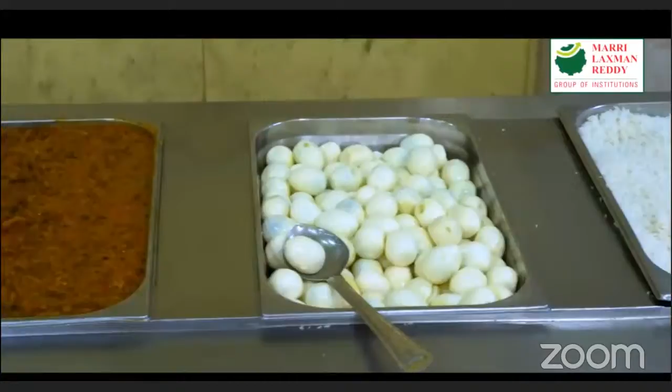Students here tend to learn, experimenting with their life projects through centers of excellence tied up with various industries. Spacious and comfortable classrooms, covered corridors, and advanced laboratories equipped with ultra-modern audio-visual technology, an auditorium accommodating 1,000 plus audience, separate hostels for boys and girls, with each student especially taken care of through facilities and hygienic food in a spacious and eco-friendly canteen are among our salient features.

AICTE recognized MLR Group of Institutions is accredited by NAAC with A grade and has NBA accreditation for all programs. The MLR Sports Complex was inaugurated with the most advanced sports facilities like cricket stadium, badminton court, table tennis, billiards, and basketball.

MLR Sports Complex organizes many national and international university-level sports fests, grooming every aspirant to compete in national and international sports forums, and has successfully achieved 50 gold medals, 13 silver medals, and 16 bronze medals at various national and international sports events. MLR Group provides free admissions every year supporting aspirants under sports quota with scholarships for meritorious sportspersons to pursue their career in sports and opportunities in the government sector.

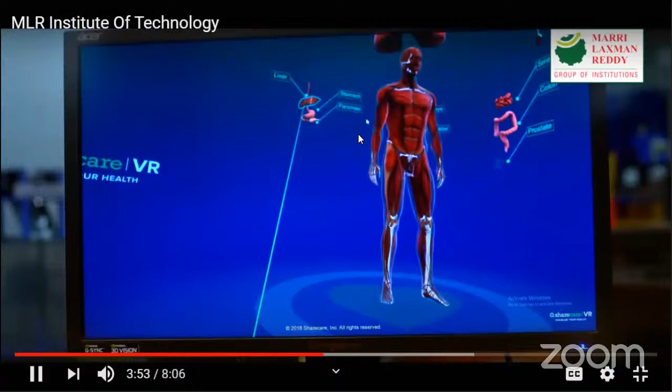To sharpen and educate students' creativity and entrepreneurial skills, MLR Group has established the Center for Innovation and Entrepreneurship, with facilities like Social Square, Innovation Hub, and Makerspace. The Makerspace is a technical prototyping platform for student innovation and invention, loaded with ultra-modern equipment such as multimedia workspaces, 3D printers, CNC machines, and laser cutters.

This provides a stimulus for student entrepreneurs. The center has collaboration with various government and non-government ministries for raising seed funds to incubate student projects and startups, and has developed 8 plus market-ready products and supported 11 plus student startups.

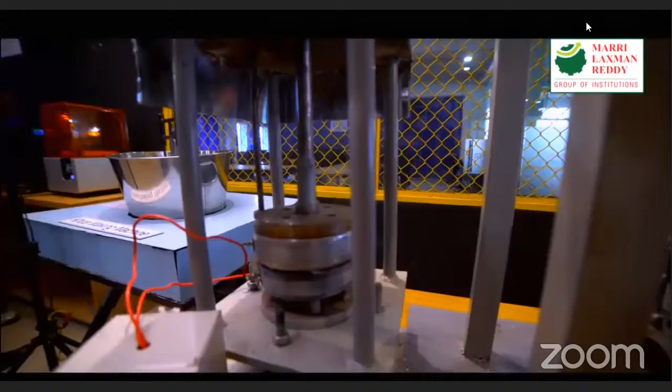MLR Group has set up a livelihood business incubation center in association with the Ministry of Micro, Small and Medium Enterprises (MSME) to promote new technology for livelihood-based enterprises. The Research and Development Cell has 12 centers of excellence in association with various industries, supporting faculty and student research, with a track record of 25 plus funded projects, 700 plus SCI or Scopus journal articles, and 35 plus intellectual property rights, with progress continuing.

In preparing aspirants for real-world competitiveness, MLR Group of Institutions has introduced the Indo-Universal Collaboration for Engineering Education (IUCEE), to introduce outcome-based student-centric education and Bloom's taxonomy-based teaching, learning and evaluation processes, along with projects in community services, EPICS, in association with Purdue University, USA.

SCOPE, the School of Programming Practices, hones coding and programming skills. STEPED, the Students Platform for Engineering Education Development, empowers students to become a factor of change in engineering education and its effect on society and environment.

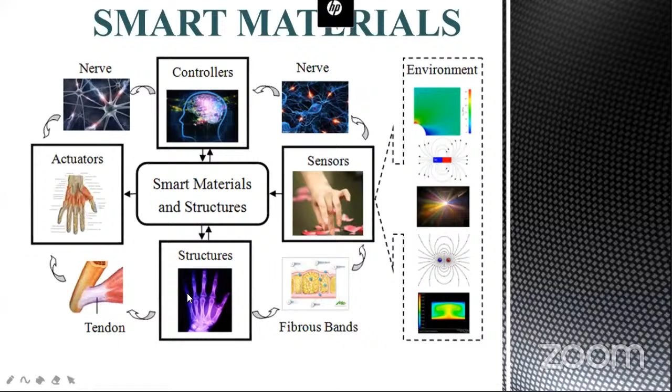Smart materials basically involve sensors, actuators, controllers, and structures. As shown in this diagram, actuators give the required force to the material, the controller controls how much force has to be given, sensors sense how much force is being given, and a feedback mechanism exists so that the structure responds depending on the requirement.

Smart materials are new generation materials surpassing conventional structural and functional materials. These materials possess adaptive capabilities to external stimuli such as loads or environment, with inherent intelligence and mutation of different characteristics. Smart materials have sensing capability and actuation capability. In real-time scenarios, they sense how much force is required and give the required force to the structure in order to protect it from the environment or external forces.

Smart materials are basically classified into two categories: active and passive. Active smart materials possess the capacity to modify their geometric or material properties under the application of electrical, thermal, or magnetic fields, thereby acquiring an inherent capacity to transduce energy. Examples of active smart materials include piezoelectric materials, used in various structures to handle different loads, and shape memory alloys, which give different shapes depending on the environment - if heated, they regain their original shape, and if cooled, they again give some actuation force.

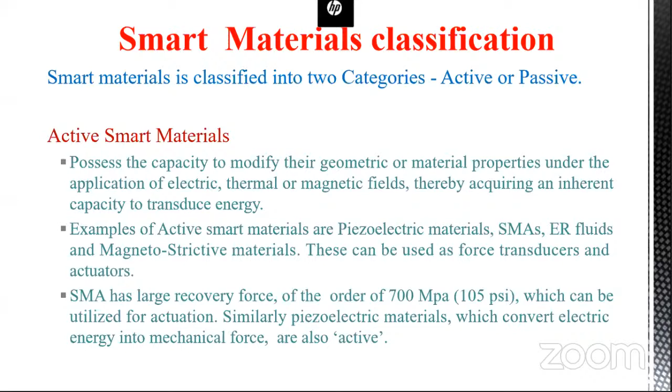Passive smart materials, although smart, lack inherent capability to transduce energy. For example, fiber optic materials are a good example of passive smart materials. Such materials act only as sensors, but not as actuators or transducers.

Different types of smart materials include piezoelectric materials, very common examples where they produce voltage when stress is applied. Since this effect also applies in reverse, voltage across the sample will produce stress within it. Suitably designed structures made from these materials can bend, expand, or contract when voltage is applied. Piezoelectric materials are commonly experienced in various structures and environments in our day-to-day life.

Thermoresponsive materials, either shape memory alloys or shape memory polymers, are materials that can hold different shapes at different temperatures. Shape memory alloys will vary their shape depending upon temperature, and if you change the temperature, they go back to original shape, or if heated, take a new shape as desired. With this, we can alter shapes and experience the forces or stresses required for day-to-day monitoring.

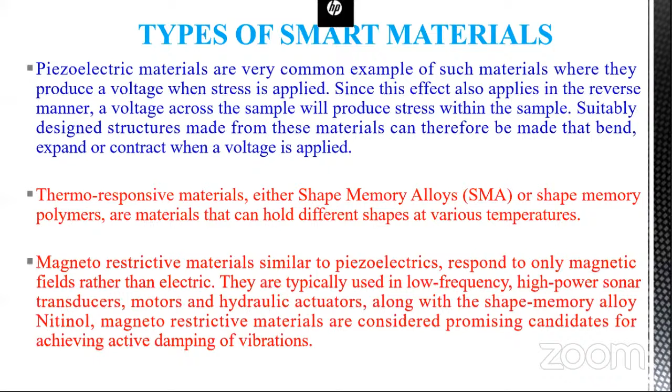Magnetostrictive materials, similar to piezoelectrics, respond only to magnetic fields rather than electric fields. They are typically used in low frequency, high power sonar transducers, motors, and hydraulic actuators. Along with the shape memory alloy nitinol, magnetostrictive materials are considered promising candidates for achieving active damping of vibrations.

pH sensitive materials change their color as a result of changing acidity. This can be applicable for paints that change color to indicate corrosion in the metal underneath. Chromogenic systems change color in response to electrical, optical, or thermal changes. Electrochromic materials change their color or opacity upon application of voltage. A very common example of such types is liquid crystal display materials.

Polymer gels such as hydrogels have a cross-linked polymer structure inflated with a solvent such as water. The gel has the ability to swell or shrink up to 1,000 times, given changes in example of temperature or pH of the material.

What are the various types of applications of smart materials? It can be used for self-repair, like embedding thin tubes containing uncured resin into the materials. When damage occurs, these tubes break, exposing the resin which fills the damage and sets. Self-repair could be important in inaccessible environments such as underwater pipes or in space.

Suppose in space, if any satellite structure gets damaged because of the environment, we cannot go and repair it; it would be very costly. So if you embed smart materials, when the structure breaks, the embedded tube will break and fill the gap with the resin placed there, and the structure will become functional again. This type of smart self-repair kit is available, and is also in practice in various aircraft.

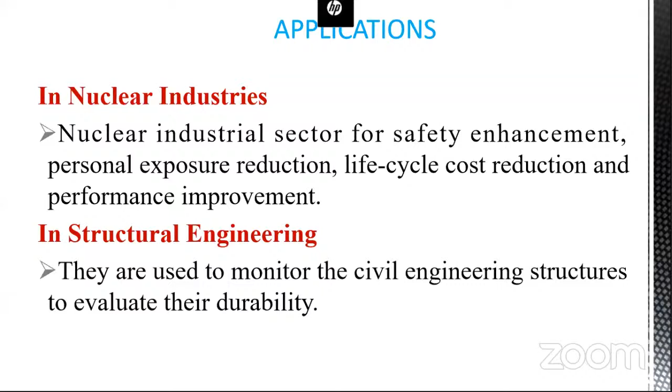In nuclear industries, for enhancement of safety, personal exposure reduction, life cycle cost reduction, and performance improvement, smart materials are extensively used. In structural engineering, they are used to monitor civil engineering structures to evaluate their durability.

What is meant by smart structure? A smart structure will have four components: actuators, sensors, electronics, and control systems. Actuators give adaptive response using shape memory alloys, piezoelectric devices, MR fluids to respond to the environment. Sensors gather information using optical fibers and piezoelectric materials, and pass it to the controller and electronics for transfer of information, signal detection, and control. So the smart system consists of a smart structure with sensors, actuators, and control system.

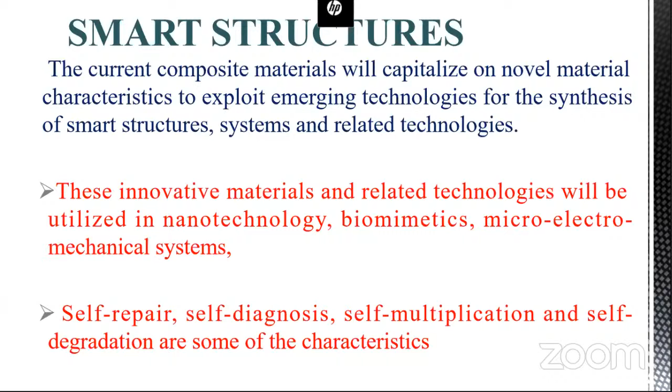What are smart structures? Current composite materials will capitalize on novel material characteristics to exploit emerging technologies for the synthesis of smart structures, systems, and related technologies. These innovative materials and related technologies will be utilized in nanotechnology, biomimetics, and microelectromechanical systems (MEMS). Self-repair, self-diagnosis, self-multiplication, and self-degradation are some of the characteristics of these smart structures.

Multifunctional materials and adaptive structures have intrinsic or extrinsic capabilities to respond to an external stimulus in a useful manner. The external stimulus being sensed could involve a change in the material's environmental conditions, such as light, temperature, pressure, humidity, electric field, and magnetic field, etc.

The response to an environmental change would involve a change in one or more of the material's physical properties, such as size, shape, color, structure, conductivity, magnetization, or polarization.

So, enabling technologies for adaptive structures. An adaptive structure has three basic components: sensors, actuators, and control systems. The performance of these components dictates the overall performance of the adaptive structure. Considerable research and development activities have been directed towards realization of appropriate sensors, actuators, and control systems for customized adaptive structural applications. The technologies related to sensors and actuators are primarily based on physical phenomena, device concepts, designs, material properties, and material processing technologies.

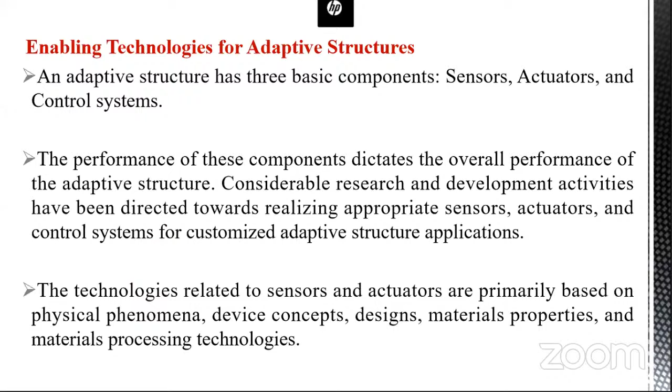Sensors: the application of energy field on a material generates a change in its characteristics. In sensor materials, a slight change in energy field can produce a significant change in one or more characteristics, and this change can be detected. So in order to get the sensor feedback, feedback is a must in a sensor. Sensors and feedback are in a closed loop. The response of sensor material can be either mechanical, electrical, optical, magnetic, thermal, or chemical.

For adaptive structural applications, the most useful response is electrical, which can be monitored and analyzed by control systems. Now, because of digital systems, wherever we want any feedback to happen, digital signals will be very useful, unlike analog signals. So optical strain sensors have been developed within the past few years for aerospace and space applications.

So the types of smartness in structures, as explained earlier, are closed loop and open loop. Closed loop smart structure senses the changes to diagnose the nature of the problem, takes action to mitigate the problem, and also stores the data of the episode for future reference. Open loop smart design is such that structural integrity is enhanced only when needed, and the structure relapses to its normal state when there is no need for enhancement.

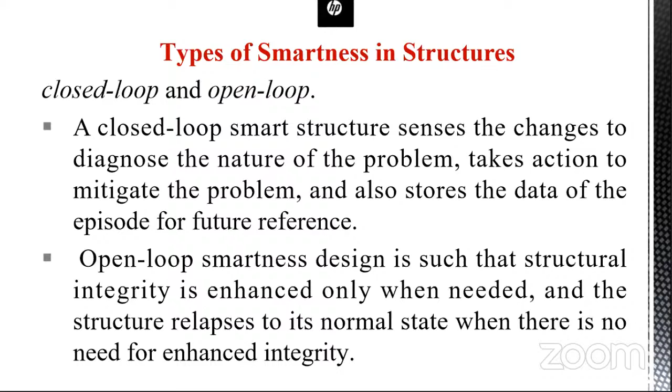So, biomimetics. Biological structures are all smart structures. If you mimic biological structures, the smart structures, we can implement it in mechanical or electrical systems. Biological structures or systems are the smartest, and in terms of energy consumption, the most economical.

So man-made smart structures are on an evolutionary path in the following sequence. You can see the various smart structures as explained here. Actively smart structures will have sensor, feedback, and enhanced actuation system. Very smart structures will have sensors, feedback, enhanced actuator action, plus one or more other biomimetic features.

So, intelligent structures: actively smart structure endowed with a learning feature so that the degree of smartness is increased with experience. So there are wise structures. They are called wise structures because moral and ethical decisions also they can take.

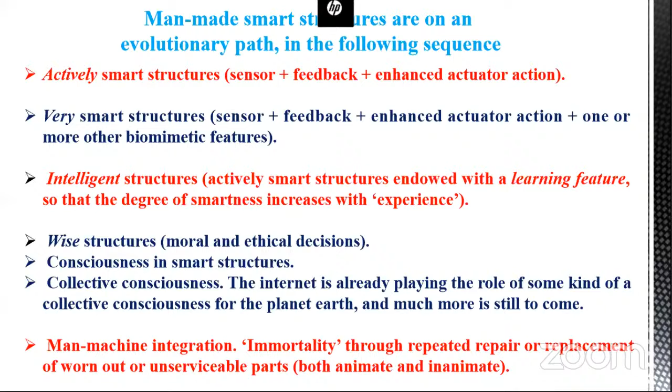Consciousness in smart structures, collective consciousness. The internet is already playing a role in some kind of collective consciousness for the planet Earth, and much more is still yet to come. So the man-machine integration with intelligent structures is the order of the day. So both wiseness and intelligence are built into these features.

Shape memory alloys have the ability to return to their predetermined shape when heated. Shape memory alloys are basically used wherever a force is required. If you change the temperature, the force can be obtained by change in the shape of the materials. So we are using a lot of shape memory alloys in our aircraft and missile applications.

So when this alloy is below its transformation temperature, it undergoes low yield strength and will deform easily into any new shape, which will be retained. If this alloy is heated above its transformation temperature, it changes its crystal lattice structure, which returns to its original shape.

Shape memory alloys are remarkably different from other materials, primarily due to shape memory effect and pseudo-elasticity, which are related with the specific way the phase transformation occurs, biocompatibility, high specific strength, high corrosion resistance, high wear resistance, and high anti-fatigue property. Shape memory alloys are taking active shape in all the new generation aircrafts and missile systems, which is extensively used for complete remote applications.

Shape memory alloys are used in many applications such as aerospace, medical, automobile, tubes, controllers for hot water valves.

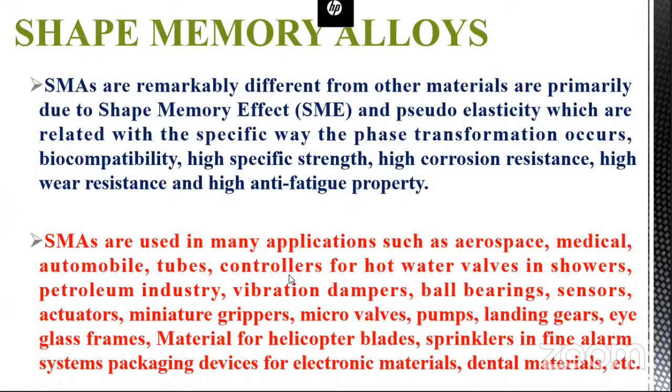Phase transformation process for shape memory alloys. This is basically a metallurgical marvel. If it is cooled, the austenitic behavior will change into martensite behavior. Again, when it's heated, it comes back to austenite. So for this property, we are using it for different applications.

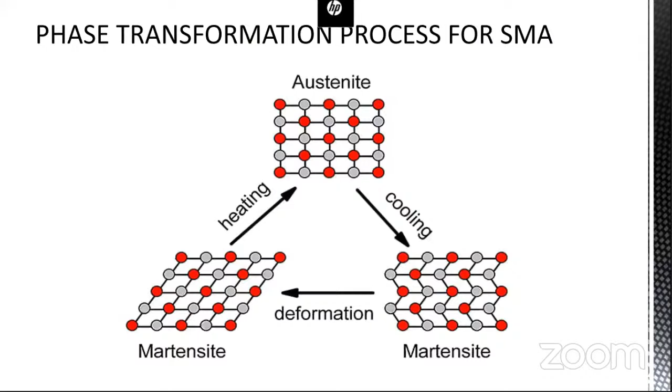So the change in material shape, which is acting as a force, is converted into actuation force. So smart actuators give force whenever required as per the structural applications.

So what are the smart actuators? Recent developments of microelectronics and communications have widely contributed to the evolution of sensors and actuators and have given rise to an increasing interest in distributed intelligent systems. The local data processing capabilities associated with the sensors and actuators give them new functionalities, promoting them to the status of smart sensors. So we are using a number of smart actuators in our systems to deploy the wings, deploy the landing gear applications.

Many such applications are there in the aircraft and missile fields. The distribution of intelligence among all the components of the automation system transforms the centralized supervision systems into distributed intelligent systems. The interconnection of a number of intelligent objects which produce or consume information via communication systems associated with global management rules. Local computing power generates locally available information for the overall supervision system or for the smart instruments.

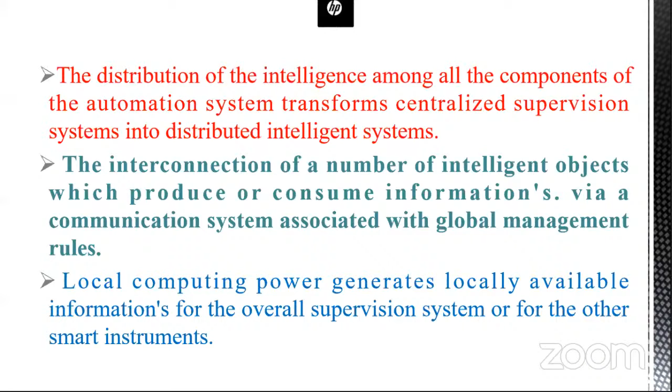So for an actuator to be smart, its efficient collaboration with a sensor is of utmost importance. The sensor senses the stimulus from the environment under investigation. The actuator then acts as a muscle and gives the required force for the actuator movement.

So you can see there are various composites used in different aircraft and missile applications. This is one diagram which is showing self-healing composites. So composite is a layered material.

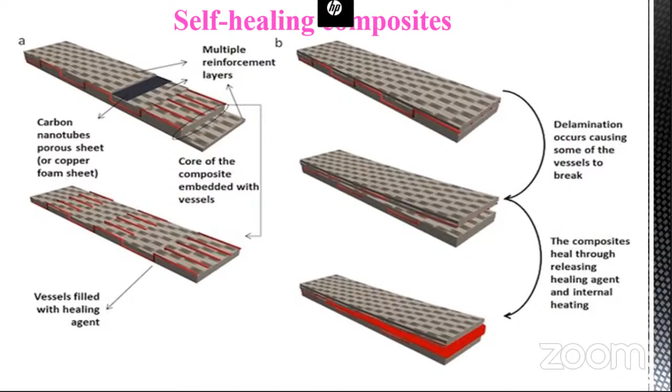We can embed some of the resins in the form of a liquid in the smart composites. Whenever the composite gets delaminated because of the hostile environment, the resin, whichever is kept inside the composite, will get broken, and the resin will flow into the delamination area, and again it gets bonded. So that is the way we can repair the composites remotely. This is called the self-healing of the composites.

So we can see achieving materials that are able to repair themselves after damage, the same as what biological samples do, was an important issue. Using such smart materials would decrease the need for continuous and expensive supervising, repairing, and difficult reinforcing.

This matter is more important for cases such as space stations, underground submarines, and sensitive nuclear foundation constructions for their limited access of supervising technicians. Suppose in space, if some structure gets damaged, it is very difficult to go and repair there. Suppose if you embed such self-healing composites in the structure, so whenever the structure gives way, the self-healing capability will make the structure all right.

However, in the best conditions where supervision or diagnostics are performed accurately, it wouldn't certainly lead to a practical repairing. So engineers try to model self-healing materials inspired by biological systems. By taking advantage of nanotechnology, engineers imitate healing mechanisms of living organs to accomplish the strategies of self-healing materials.

Inspiring function of blood cells in blood clotting motivates researchers to make microcapsules filled with healing agents. This self-healing practice came by observing normal human beings, how when something happens to the skin, the stoppage of the blood happens automatically. So in the same manner, we want to mimic the structures in engineering also with the self-healing capability.

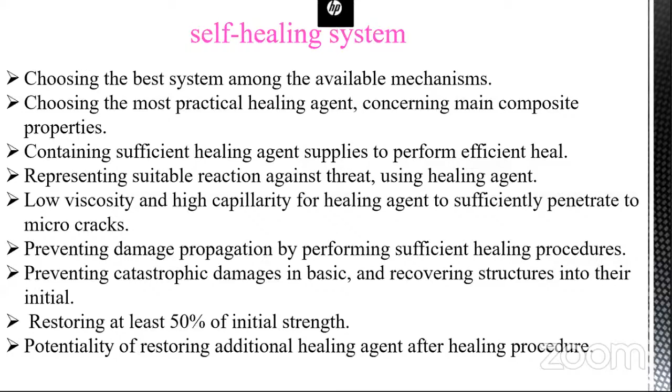So in this method, tiny spherical microcapsules filled with the healing agent are embedded in the main composite, accompanying catalyst in the main composite. Usually the healing agent is made of dicyclopentadiene, which easily polymerizes in the presence of a catalyst and transforms into a hard substance, making the structure operational again.

I will briefly explain about composites in my next session. Just wait, I will share the screen.

Are you able to see my screen, madam?

Advanced composites for aerospace applications. Till now I have talked about smart materials, which is an emerging field, and we have also adopted using smart materials in a small way. Now I will explain advanced composites, which we are already using extensively, with some case studies. I will be just briefly telling about composites.

What is a composite? Composite materials can be defined as a combination of two or more materials differing in form or composition on a macro scale, but acting in concert in combined form, retaining their identities across the interface between one another. So fibers plus resin equals composite. One constituent is called reinforcement, and the other, which is embedded, is called the matrix or resin.

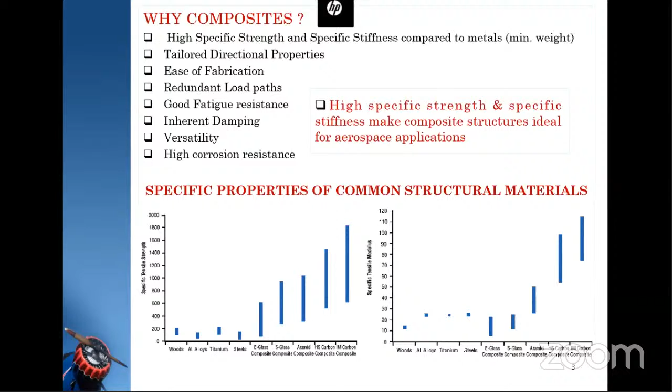So why are composites gaining so much importance? The main reasons are high specific strength and high specific stiffness compared to metals, tailored directional properties, ease of fabrication, redundant load paths we can create, good fatigue resistance, inherent damping capabilities, versatility, and high corrosion resistance. Compared to metal with respect to weight, composites give more strength relative to their strength to weight ratio. So high specific strength and high specific stiffness make composite structures ideal for aerospace applications. Composite materials basically consist of two main materials: one is called fiber and another is called resin.

What does the fiber do? Fibers carry the principal load carrying members and provide necessary strength and stiffness. Fibers are drawn into small wire kind of material, so these have very low internal defects compared to bulk materials like metals. Fibers will have very high L by D ratio.

What is the resin? Resin supports the fibers and protects them, gives shape to the structure, and acts as a media for load transfer between the fibers. A resin has a lower density, strength, and modulus than fibers. Fibers are useful only after they are bonded together to take the form of a structural element that can carry loads. Combination of fibers and matrix results in lower density.

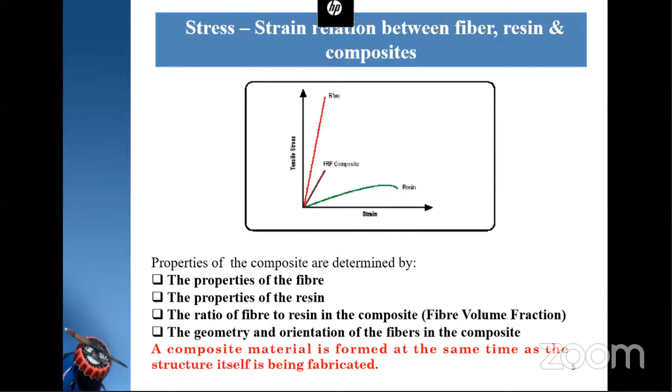There are various types of composites, classified depending upon the matrix and depending upon the reinforcement. There are basically metal matrix composites, which include mixtures of ceramics and metals such as cemented carbides and other cermets, as well as aluminum or magnesium reinforced by strong and high stiffness fibers.

There are other composites called ceramic matrix composites. A less common composite matrix, aluminum oxide or silicon carbide are the materials that can be embedded with fibers for improved properties, especially in high temperature applications.

Polymer matrix composites, which we are widely using in our missile applications, are thermosetting resins, mostly epoxies or phenolics, which are commonly used with various types of fibers like e-glass, carbon, boron, and silica.

There is another variety of composites called carbon-carbon composites. Here, the high temperature capability is achieved by converting the resin into carbon. The reinforcement is already carbon, and the resin used as a binder can also be converted into carbon through various cycles.

Carbon-carbon composites are very useful in high temperature applications, which we have developed for nose cones of re-entry vehicle systems and carbon-carbon brake discs.

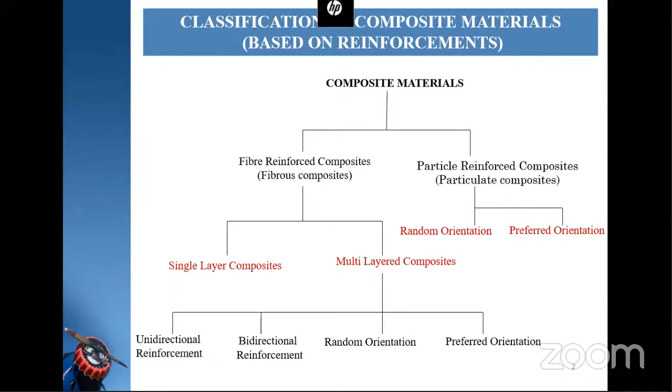Classification of fibers: fibers are the primarily load carrying members. Classification of fibers is based on materials, composition, and precursors. We can see varieties of fiber in the market.

Glass fibers are widely used for all commercial applications: E-glass, S-glass, D-glass, R-glass, high silica, and C-glass. Carbon fibers are extensively used in aerospace applications; these fibers are costly and available in limited quantities.

Carbon fiber is also based on the precursors available, like rayon-based carbon fiber, pitch-based carbon fiber, and high-strength or high-modulus fibers. Depending upon the application, we choose the fiber suitable for that application, and based on that we use the reinforcement.

Aramid fibers are basically used for impact applications, like bulletproof jackets and bulletproof materials for automobiles. Boron fibers are used in limited different applications.

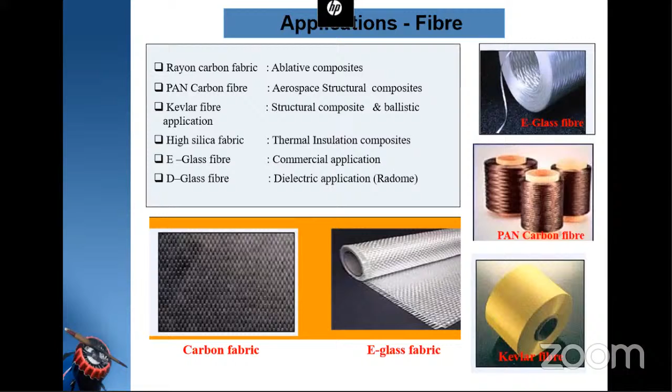E-glass fiber is meant for commercial applications, basically wherever low strength is required. We are using E-glass fiber extensively for jet deflectors and different ground-based applications. D-glass fiber is used for dielectric applications, basically radomes.

Carbon fiber takes most of the properties better in terms of performance, that's why it is used extensively in aerospace applications. Compared cost-wise, carbon fibers are costlier than glass fibers, but the other properties are very useful, so you get a better component with less weight. That's why composite carbon fiber is gaining a lot of importance.

For ballistic applications, aramid fiber is used where we get impact resistance, like bulletproof jackets and bulletproof vehicles made using aramid fiber.

There are basically two types of resins. The primary function of the resin in composite materials is to transfer stress between the reinforcing fibers and to protect the fibers from mechanical and environmental damage.

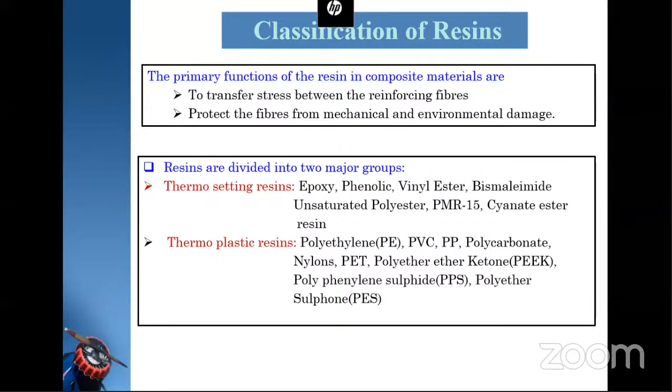So thermosetting resin systems - epoxy resin system and phenolic resin systems - are basically the two materials widely used in our aerospace industry. Epoxy resin systems are a two component resin system, resin and hardener, and it has adhesive in nature. Resin has adhesive in nature, no byproducts released during curing, and it gives high mechanical properties.

Used for structural applications. If you see phenolic resins, which we are using widely for our missile applications to make the structures in nozzles, which has to withstand very high temperature, and the re-entry vehicle structures, we are using phenolic resin.

There are two types of phenolic resins. Resole type, it is a self-cross-linking phenolic resin. Then Novolac requires a hardener. So this phenolic resin will be a high char yield material and ablative material. Volatiles are released during the polymerization process as a byproduct.

This has to be taken out by using a vacuum application. The equipment which we use for polymerization is called autoclave, which has simultaneous heating and pressurization application, and simultaneously we can vent out the byproducts by using a vacuum. Voids form during curing in phenolic resin, and that we have to avoid by using the vacuum bagging technique.

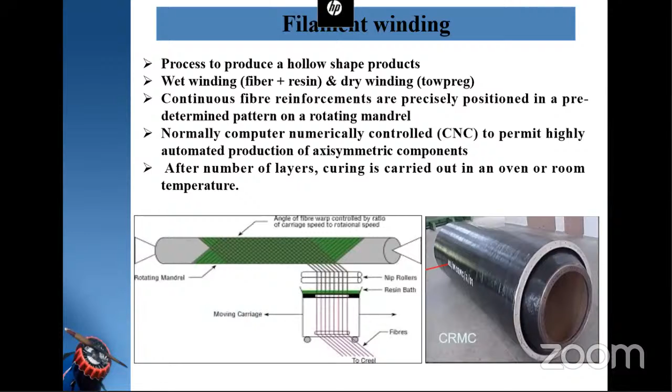So there is another technique called tape winding technique. It is similar to the filament winding machine, but in filament winding, filaments will be wound on a mandrel. Here, the tape is a part of the fabric which is already weaved into a different shape. The tape can be put onto the mandrel with the help of a preheating arrangement, and also the tape which is wound on the mandrel, we can apply some force and make nice components.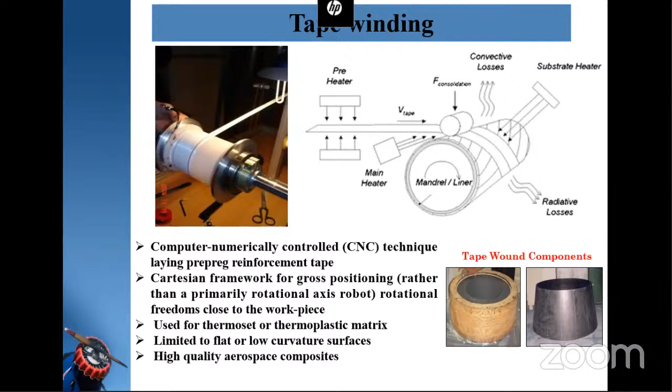Very thick components can be realized in this tape winding process, which is used for nozzle applications. As you see in the diagram, divergent cone shaped articles and cylindrical shaped throat backups are manufactured by this method. This method is extensively used in our aerospace applications like nozzle applications and some other components, used for different nozzle materials. There is another important technique called compression molding.

Compression molding is a process where we use a hydraulic press to make components using a punch and die. The charge is placed between the punch and die, and simultaneously the mold is heated and pressure is applied to consolidate the polymer matrix composites.

Materials like fiber fabric impregnated with resin are charged to a specific size mold, closed and heated under pressure. We have realized nice components using this technique, around 1 meter diameter and around 400 mm thick. This is like a forging kind of material we can make, and then we can machine it to the required shapes for the nozzle components.

The charge is placed in the cavity of a matched die mold in an open position. The mold is closed by bringing two halves together using a hydraulic arrangement. Pressure is exerted to squeeze the resin so that it fills the mold cavity. While under pressure, the mold is heated and the polymer is polymerized to get nice composite components suitable for highly thick components. Here you can see this is one of the products we have made.

Here the mold is filled with carbon phenolic prepreg flakes and it is put into the cavity of the mold. The punch comes from the top and closes. Once it is heated and pressure is simultaneously applied, we make the convergent of a flex nozzle system. Here we can get high density composites, but with variation in strength and thermal conductivity because of the flakes configuration, high volatile content, giving rise to more erosion.

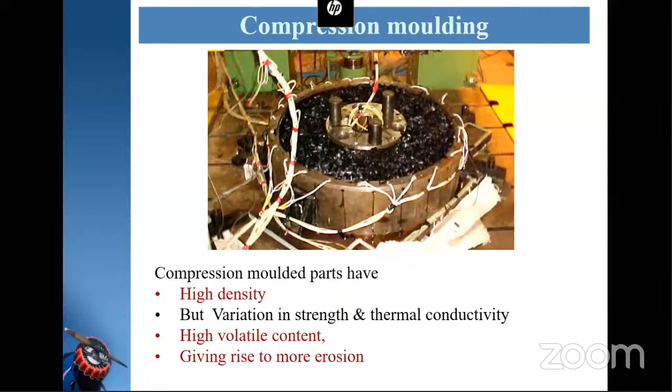There is another important process called vacuum bagging method, autoclave bagging, and pressure bagging. These are all called match die molding methods. Here one side we use the mold, and on the other side a flexible bag kind of material that is called a vacuum bag, where we make the components, and it will be cured in an autoclave. So here we can apply simultaneously the pressure and heat also, so that we will get nice polymerized composites.

In some applications, we can apply the pressure through a bag using thermofluids, so we can apply the heat. That is also called the pressure bag technique. The composite material is pressed between heated matched dies. Pressure required depends on the flow characteristics of the feed materials. The feed material flows into the contours of the mold and cures at high temperature.

In this process, near net shaped components can be obtained. Here we can see the conical part, which is made at one go. Suppose in metal, if you want to make this type of cone, you have to make the sheet, cut it into shape, roll bend, and then weld. But unlike in metals, with composites, if we have the mold, we can place the fibers, put both the male and female molds together, heat it, and the final component is obtained.

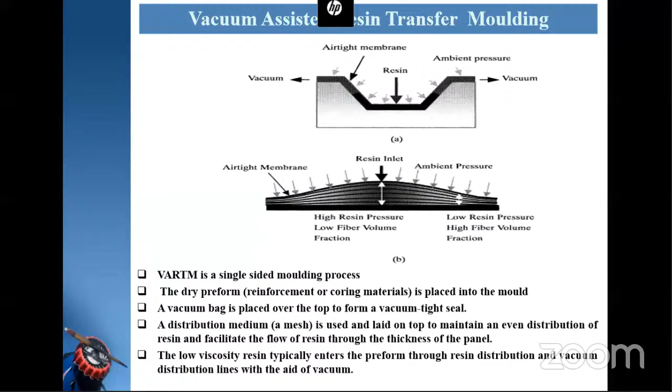So this method is widely used for commercial applications. This is a normal method, wet layup or hand layup process. Here one side mold is used, then the fiber is placed, and the resin is taken and spread across the reinforcement by using a hand or spray layup process. This is basically used for commercial applications.

The most important process in terms of current aerospace production is the hand layup of prepregs. In spite of steady progress to replace the hand layup process with automated process, it still persists as the method by which at least half of all advanced aerospace composite structures are made. It is extremely flexible and capable of making a wide variety of shapes. The process involves preparation of the mold, application of release agent, application of gel coat, hand layup, curing, trimming, and finishing. So hand layup process is widely used in aerospace applications also.

We can make varieties of components by using prepregs, a wide variety of components. We can put the fibers wherever extra thickness is required. Variable thickness components also we can realize by this process.

Just like the hand layup process, there is another technique called spray layup process, which is used for commercial applications and mass production. Here the fiber and resin are both cut and sprayed by using a gun. This layup process also uses a one side mold. So it's a variation of the hand layup technique.

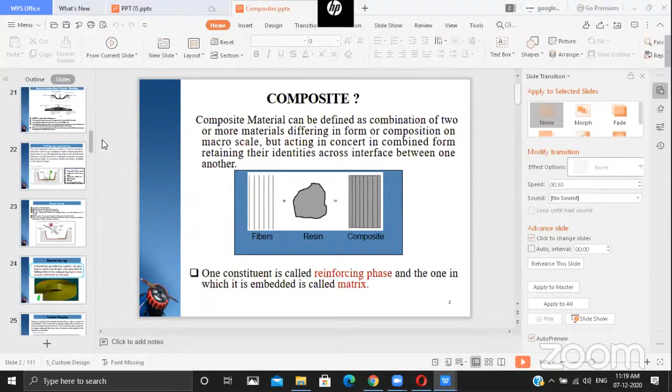Hello, are you able to hear me? Yes sir, we are able to hear you. This is another important technique, layup technique called rosette layup technique. Yes sir, we are able to see that.

This is another important technique called vacuum bagging technique, which I already explained, where we can apply pressure of about 1 bar, 1 atmospheric pressure, through a vacuum bagging technique, where there is no autoclave. Such components we can realize by using the vacuum bagging technique.

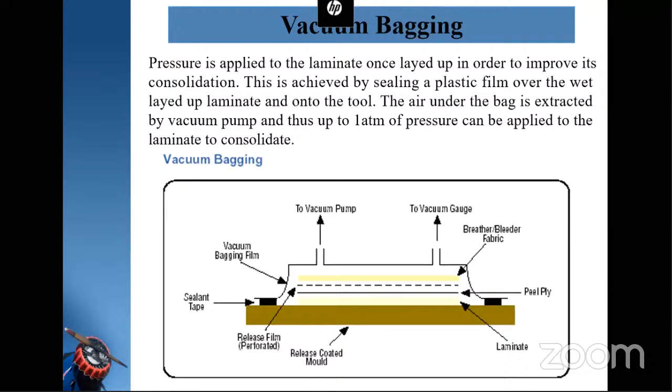This is an equipment called autoclave curing. Autoclave is a pressure vessel where we can apply simultaneously pressure, temperature and vacuum to polymerize the composites. This method is widely used in aerospace industry to cure the components. We get good consolidation of the parts through this method. Here you can see this is a pressure vessel where we can keep the component inside and simultaneously apply heat and pressure through air and vacuum also in order to extract the volatiles from the component. This is an important equipment in the aerospace industry.

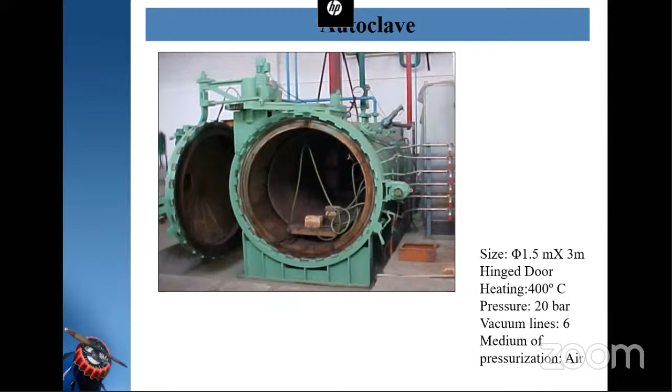So here you can see the actual equipment which is installed in our laboratory. It is around 1.5 dia and 3 meters long, with a door mechanism like a pressure cooker concept. The door is designed so we can heat the component up to 400 degrees centigrade and apply pressure around 20 bar, with vacuum lines given for extracting volatiles from the component during pressurization. 6 vacuum lines are available, and we can apply a maximum of 1 bar negative pressure in the component.

So this is another important technique called impregnation of the fiber with the resin system, called an impregnation plant or prepreg plant. Here you can see the schematic diagram.

The fiber comes from the unwinder and gets heated into a preheating chamber where volatiles are evaporated. You can heat up to 80 or 100 degrees centigrade, and then it gets into a squeezing station where the resin is available, and it gets mixed with the resin.

The excess resin is squeezed out between two rollers called the squeezing station, and then it gets heated onto heating zones 1, 2, 3, 4, where each zone is maintained at different temperatures so that all the volatiles are evaporated, and it gets cooled in a cooling roller chamber, and then unwinded onto a roller.

So here you can see this actual prepreg plant which is available in our advanced systems laboratory, where we regularly impregnate the fabric with the resin system using phenolic resin. This is a vertical impregnation plant, we call it.

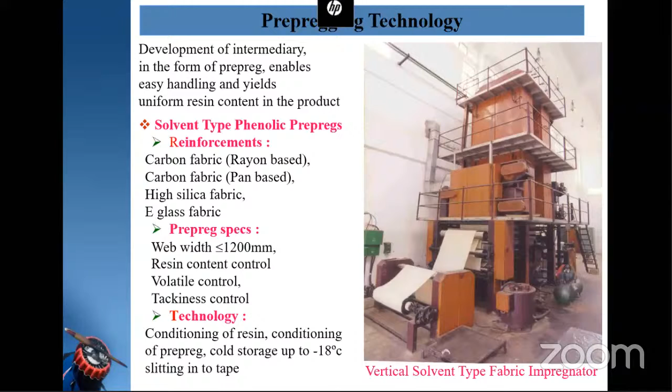In this impregnation process, we have to control the resin content, volatile content, and tackiness content. For this, we have different parameters like squeezing, heating, and cooling. All these parameters we have to control while doing the impregnation process.

We can use very high temperature resistive applications like re-entry vehicle structures, which can withstand up to 3000 degrees centigrade. Then ultra high temperature composites, carbon-carbon nose tips, and control surfaces we can get using these composite materials.

Then structural applications, we are using radomes where the front part of the aircraft nose cone is made of radome, which is made in polymer to enhance electromagnetic radiation capabilities. The inside antenna will be there, emitting and receiving electromagnetic waves in order to detect the enemy, where enemy aircraft or targets are placed.

Then secondary structures, we have different types like warhead casings, ablative liners for nozzles, and thermal protection system components that can be realized. So there are various types of machineries and materials used in composite technologies.

We have 5-axis filament winding machines, meant for different types of axis symmetric components. Then autoclave, then we have a CNC tape-laying composite machine, and lattice structures. Then all the composites which are made have to undergo ultrasonic testing, called non-destructive examination.

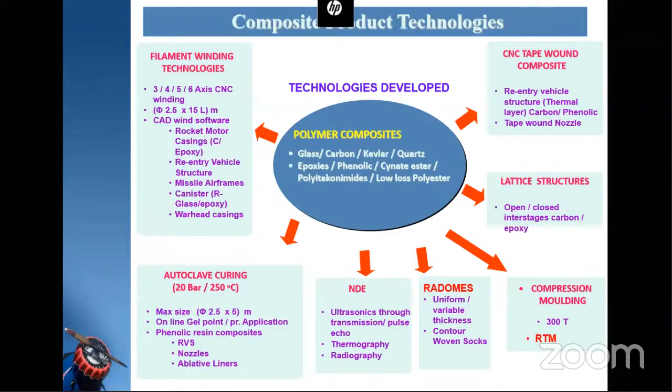And we are also using resin transfer molding techniques. The basic fibers used in our setup are glass fiber, carbon fiber, Kevlar fiber, and quartz fiber. The resin systems we regularly use are epoxies, phenolics, cyanate esters, polyitakonimides, and low-loss polyester materials.

Here I will be explaining some of the case studies which we have developed in our advanced system laboratory for different aircraft and missile applications.

The composite drop tanks are developed for the first time in India with state-of-the-art technologies. It is the lightest in its class, designed for lightning protection, and has the least radar cross-section. Drop tanks are mounted externally either inboard or midboard of the wing stations or under the fuselage, in order to enhance the flight duration.

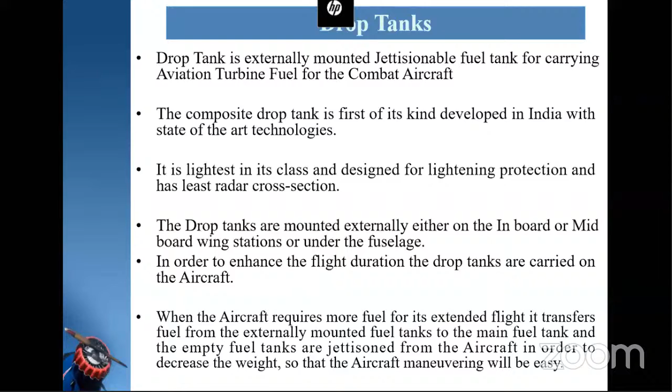When the aircraft requires more fuel for extended flights, it transfers fuel from the externally mounted fuel tanks to the main fuel tank, and the empty tank can be jettisoned to increase maneuverability. Inside, the tank has baffles, bulkheads, structural components, and sensors, along with various cutouts for filling fuel and transferring it between the main craft and the drop tank.

We have developed 3 varieties of tanks. One is the 800 liter tank, with a diameter of 550, length around 4.5 meters, weighing around 78 kgs. Compared with aluminum tanks, these are almost half the weight, which is why they are developed in composites.

Then the 1200 liter inboard tank, with diameter 640, length around 5.04 meters, weighing around 100 kgs. It can carry 1200 liters of fuel.

This aircraft has varieties of cutouts to fill the fuel, and for safety we have relief valves and other features. For the connection between the mother tank and the main tank, we have fuel valve and air valve connections. To carry this tank on the wing, we have an ejector release unit, ERU, embedded in the tank.

These are made by hot melt epoxy prepreg technique, which is the main process used, along with hand layup and autoclave molding with a female mold. The tank consists of varieties of components like sheet metal parts, bulkheads and brackets, metallic parts, piping, electrical and rubber parts, metal fasteners, and line replaceable units.

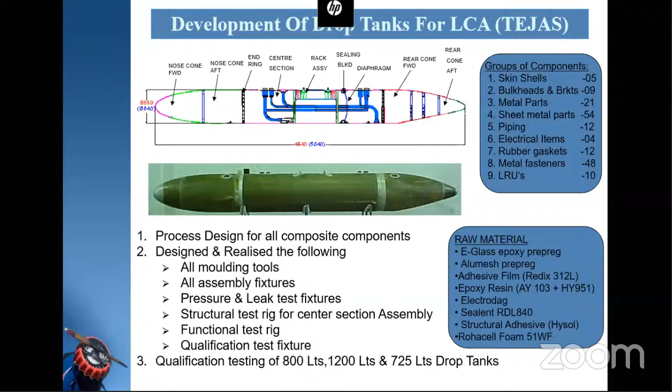We did the process design of all composite components, and designed and realized different types of molding tools, assembly fixtures, pressure and leak test fixtures, structural rig, and for the center section assembly, functional test rig and qualification test rig. These are all developed, which I will explain in subsequent slides.

Co-curing and co-bonding technology was developed for the aluminum cap with E-glass prepreg, nose cone forward and rear cone aft, and the aluminum joint ring with E-glass prepreg for the nose cone aft and rear cone forward.

We designed and realized templates for surface development cuttings, and adopted the transfer foil technique for placing plies at the desired place and orientation. Process and cure cycles were developed for autoclave molding, compression molding, oven curing, and thermoforming of foam.

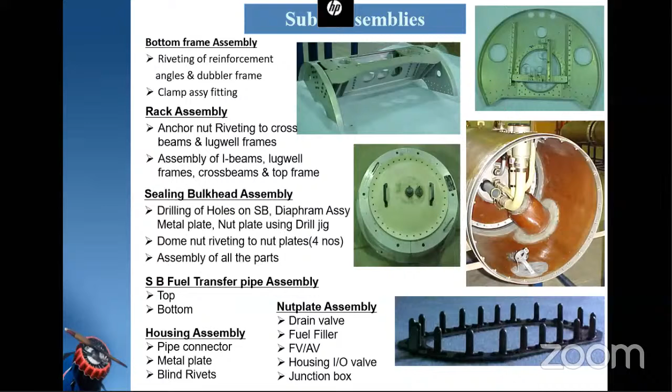These are all the sheet metal parts which go inside the fuel tank: support bracket, air pipe, support bracket, transfer pipe, clamp assembly, bottom frame assembly, various anchor nut riveting assemblies for the fuel tank, cross beam, lug well frame, I beams, and joint end rings. These are all the metal components which go inside the fuel tank.

Composites are basically porous in nature because of the fabric weaving nature and the method of manufacturing. Composites will be slightly porous, but the fuel tank should be non-porous. For that, we do resin coating inside the fuel tank in order to make the tank leak proof. So here we have developed a mechanism for the resin coating.

We heat the composite using externally mounted IR lamps, and resin coating is given inside the tank, which gets rotated so that uniform coating is applied all throughout the surface. For that, we have developed different varieties of fixtures.

Once the tank is coated with resin, we again test for leak proofness, and carry out a lot of assemblies. The cone is made in two parts, and these all get assembled as shown in the diagrams. Finally, the tank is assembled and tested for its leak proofness using different types of fixtures.

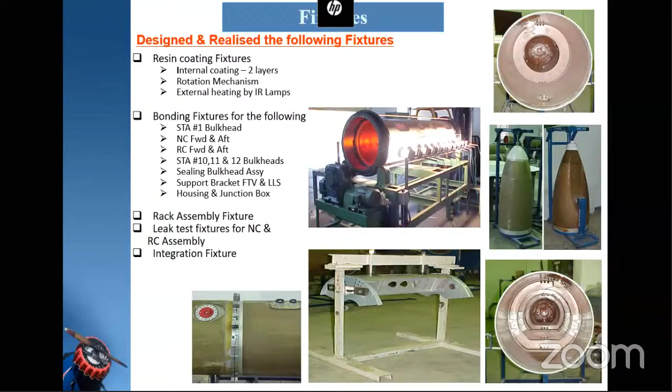So here we have to incorporate a lot of sensors inside the tank, as I explained earlier. There is a high-level sensor, low-level sensor, fuel transfer valve, and junction box assembly in the fuel tank.

So when the fuel tank is assembled to the bottom of the aircraft, the pilot should be able to know how much fuel he has in the tank. All this information is fed to the pilot dashboard using the electrical cable harness and sensors embedded in the fuel tank, so the pilot can know whether the tank is connected to the aircraft, how much fuel is available, and when he can jettison. All this information is available to the pilot on his dashboard.

Once the tank is made, we carry out a lot of tests for acceptance and qualification. Here the tank is tested for structural application using hydraulic actuators and a power pack, where we apply 2 tons load, then 4 tons load onto the lugs for 5 minutes to see if the structure can withstand that load. Similarly, we carry out fuel leak tests and pneumatic tests for qualifying different joints like junction box, housing, and sealing bulkhead.

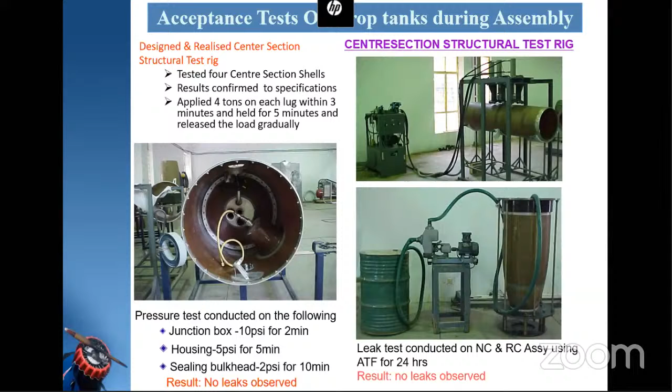So we do a lot of acceptance tests before going to the final assembly. Here we have developed one functional test rig for conducting various tests on the drop tank. This is a completely automated, computer-controlled testing setup where we can perform a lot of operations using this rig.

Simultaneously, in the same rig, we can do functional tests like leak check by air, leak check by fuel, and strength or pressure test with fuel at around 20 psi for 5 minutes. Then we carry out a refueling check at 4.5 psi or more than 150 liters per minute, checking the refueling transfer rate. We also do a transfer check at 100 lpm from the drop tank to the main tank. So we can conduct a lot of tests using this rig.

In a similar way, we have to do the qualification test of the tank. Whatever aerodynamic loads come onto this tank are converted into uniformly distributed loads and then point loads, which we apply using this tree. We applied loads on 3 axes, X, Y, and Z, simultaneously, and measured the reaction loads using different types of load cells. We bonded strain gauges and measured strains at various locations, and measured deflections using linearly variable differential transformers.

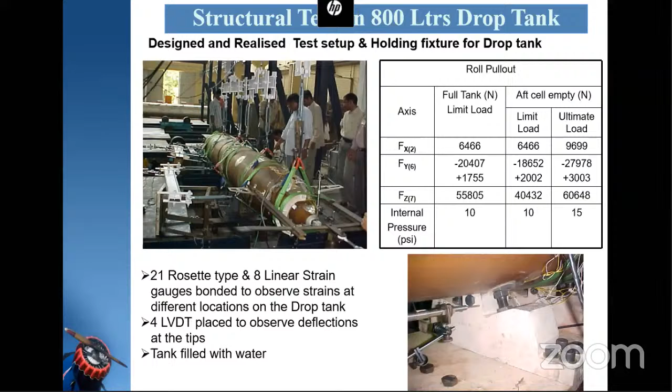Simultaneously, we pressurized the tank by filling it with water up to 15 psi. This is a one-time test which we successfully carried out, and all the measurements are within our predictions. So this is qualified for flight.

Here is another case study, a closure plate, RVS composite closure plate, meant for the re-entry vehicle structure. This is developed by composite press molding, made of carbon fiber and phenolic resin, since the plate has to withstand severe thermal load. That's why we used phenolic resin, and ribs are also incorporated to avoid deflection of the component. This component is made in one go using a two-sided mold in a compression molding technique.

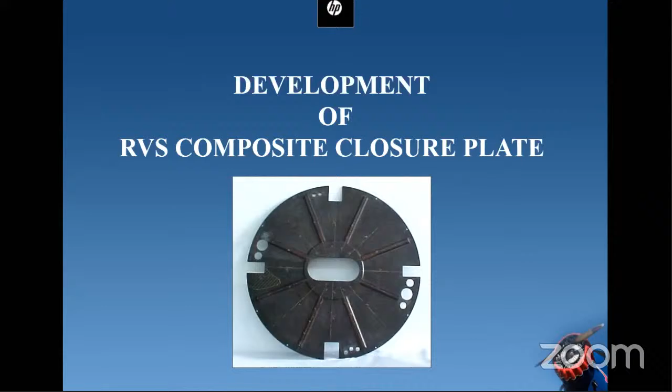For the sake of passing cables and other things to move through, we have made small cutouts. This is a lightweight plate made with ribs on one side and a plain surface on the other. Both sides of the plate should be very smooth, and it has to withstand a severe thermal environment for re-entry conditions.

Provisions are made for passing the cables and other VTP thruster modules. It should be fastened at the aft end of the bulkhead of the re-entry vehicle structure. The inside packages of the RVS system should be protected from the hyperthermal environment. We have selected an easy manufacturing route called the compression molding route.

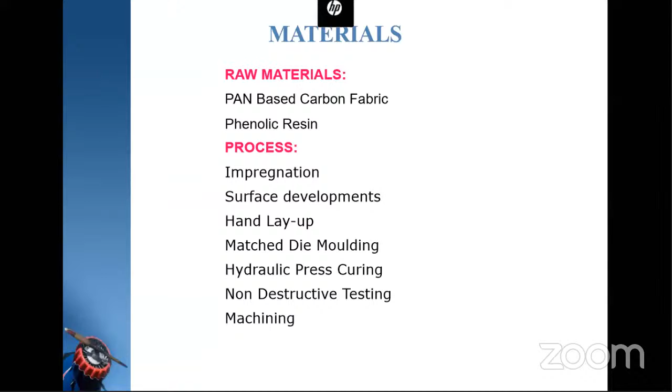Here we can see PAN-based carbon fabric and phenolic resin chosen as the fabric and resin materials. The process involves impregnation, surface development, hand layup, matched die molding, hydraulic press curing, non-destructive testing, and machining. This is the fabric specification which we used, and this is the phenolic resin.

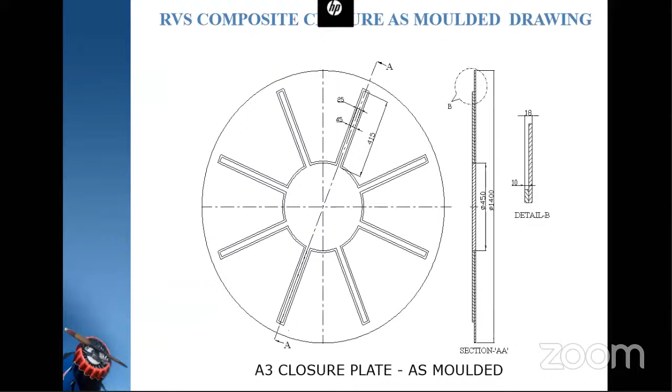This is the drawing of the component, and this is the model. These are the cutouts indicated after making the component. This is the final model with cutouts, and this is one side of the tool.

This is a compression cure cycle where we have applied around 200 tons for realization of this component. Depending upon the surface area, we can calculate the load applied onto the component, and this is the cure cycle, heating up to 180 degrees centigrade for a duration of almost 500 minutes.

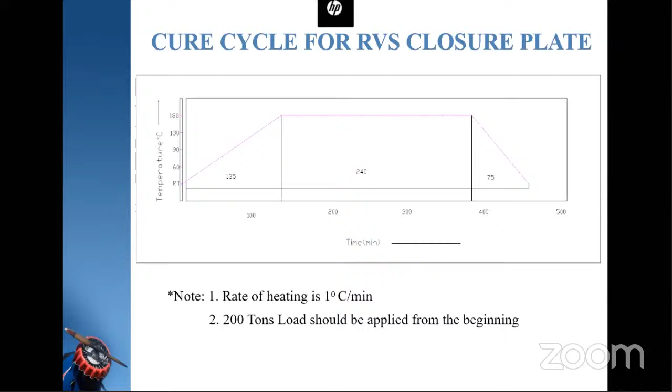This is the final shape of the component which we have used. This type of plate we have made around 40 numbers for various applications.

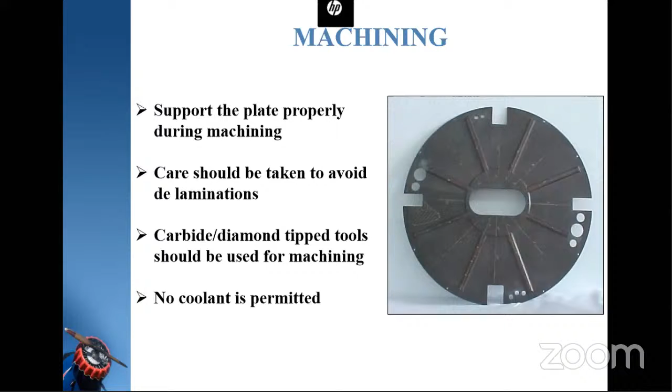These are the tests we have conducted, like ultrasonic test. Then we are doing sample tests also to find out the resin content and density. Then dimensional inspection test. This is the machining we have carried out to give the final shape and meet the requirement of the packages going onto the component.

This is another component made using carbon fabric and epoxy resin system, which has to withstand very high load requirements. This component has ribs on both sides, because to avoid deflections we have designed the plate in such a way that it will have ribs on both sides.

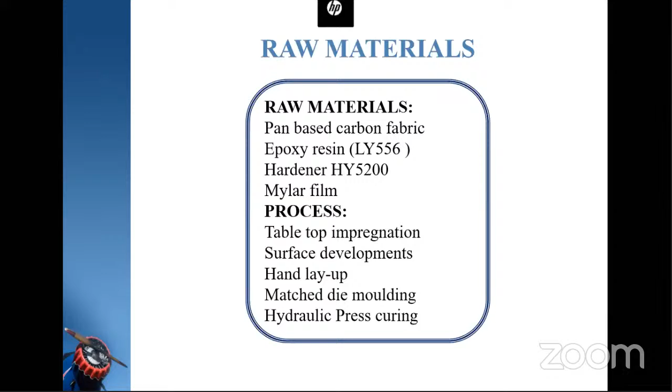It is made in a hydraulic press. The materials used are carbon fabric and epoxy resin. The process is hand layup and match die molding, with hydraulic press curing. This is the properties of the components which we have evaluated by making laminates.

Here you can see longitudinal modulus, transverse modulus almost the same, shear modulus, Poisson's ratio, then longitudinal strength, compressive strength, transverse tensile strength, transverse compressive strength, and in-plane shear strength.

These are the developments which we have used for realization of this component. These are the layer sequence, different layers, and rib thickness also we have shown here.

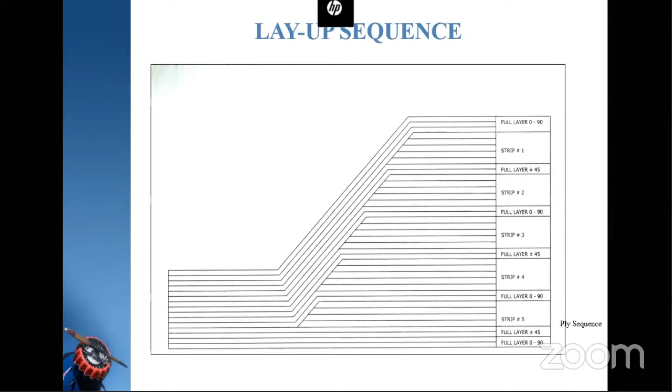This is the plate which we have on both sides, with extra stiffeners on the plate on both sides. This is the cure cycle which we have used.

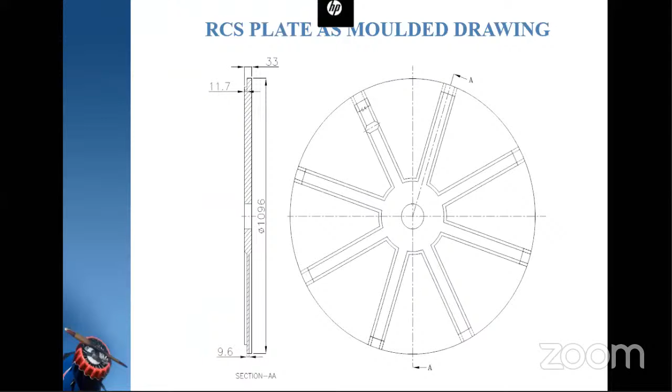This is the plate photograph which we have developed, having 8 ribs on both sides, the same similar shape. Here you can see the thickness cross section of the component. Here you can see the plate is tested ultrasonically and found in good condition.

Then we have developed samples also from the component and conducted density and resin content tests, with dimensional inspection also carried out using CMM. This is the final component which has small cutouts in order to accommodate packages.

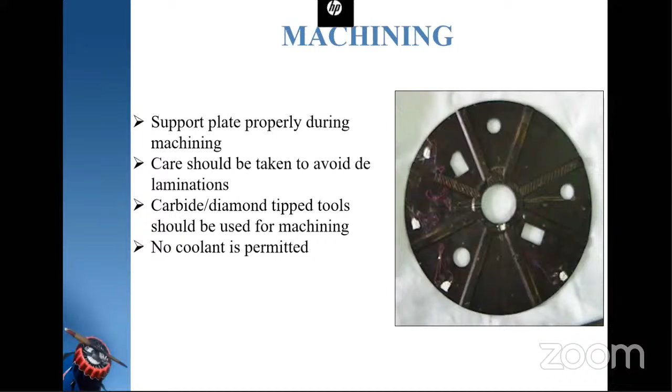This is done in order to give provision for cables and pipes. This is the component drawing. These are the final different cutouts shown in the component.

These are the properties which we have obtained using traveller coupons: ILSS, flexural strength, flexural modulus, tensile strength, tensile modulus. These are the maximum number of specimens we have tested. Minimum value observed, maximum value observed, and the average value is given here.

Then this is the load test which we have conducted in order to qualify this plate. We have applied different package loads, like air bottle and propellant tanks, which are situated on this component.

The load experienced during re-entry conditions is simulated using actuators, like a 5-ton actuator at 2 locations and a 10-ton actuator at 1 location. This is the schematic diagram.

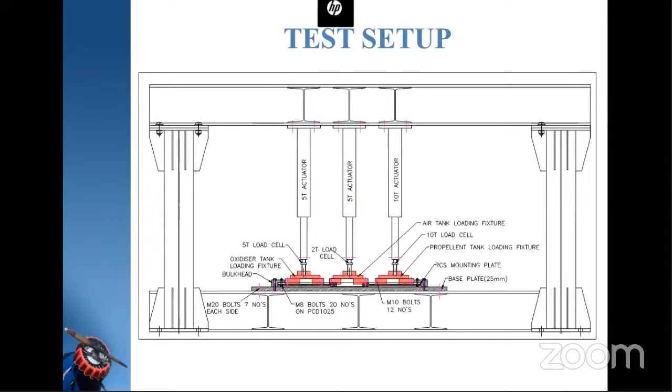This is the actual test done at our structural material test facility by simulating the loading conditions. Load is applied and we have measured strains and deflections at different locations in order to qualify this plate.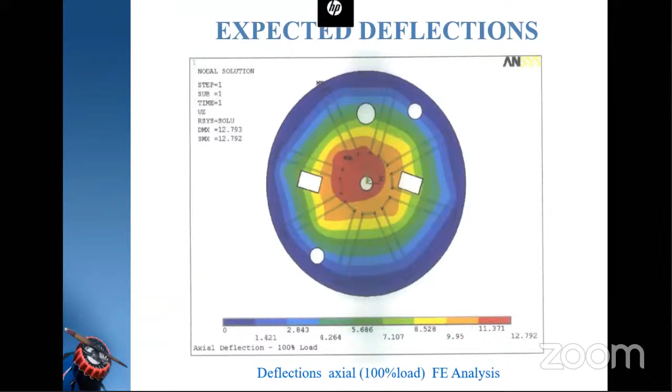This is another important component made in composite, the jet deflector, which is used under the missile. When the missile takes off, the plume hits this deflector.

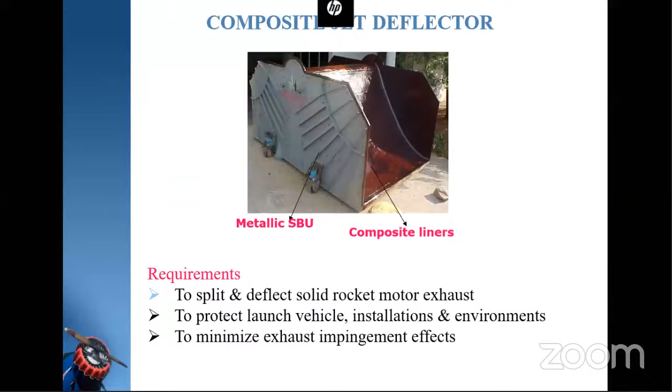The plume has very high velocity and high temperature, and it has to be dissipated in 2 directions without damaging the launch complex and the launcher related instrumentation. So the main function of the jet deflector is to split and deflect solid rocket motor exhaust gases to protect the launch vehicle from the environment and minimize the exhaust impingement effects.

So here you can see this configuration, the entire surface area is divided into different shapes of the liners, like sidewall liners, profile liners, and top of the component called ridge component.

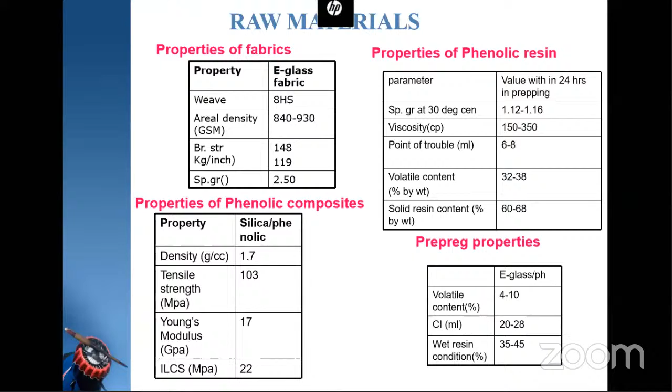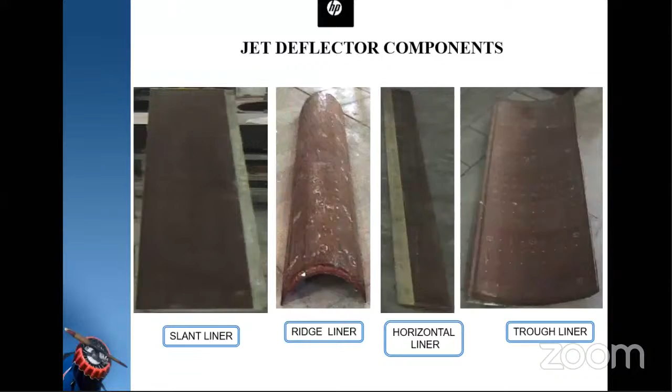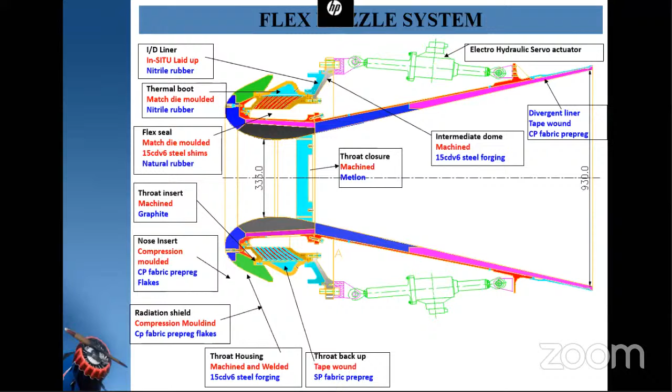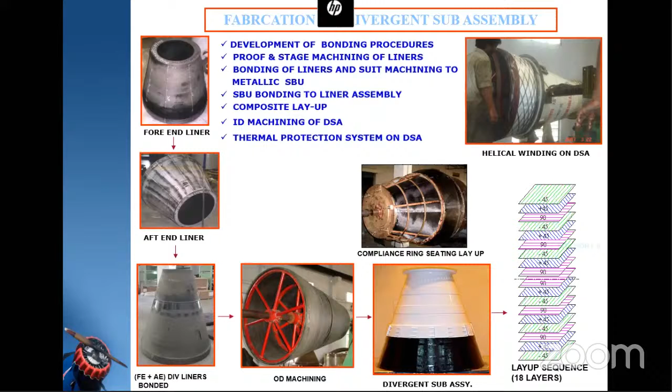So this is a divergent flow chart. We can see forend liner, aftend liner, then both bonded together, externally machined, internally machined, then it gets bonded to the structural backup. We are making composite structural backup using different layers. Here it is shown 18 layers, how we are using different types of concepts. So this is another important element.

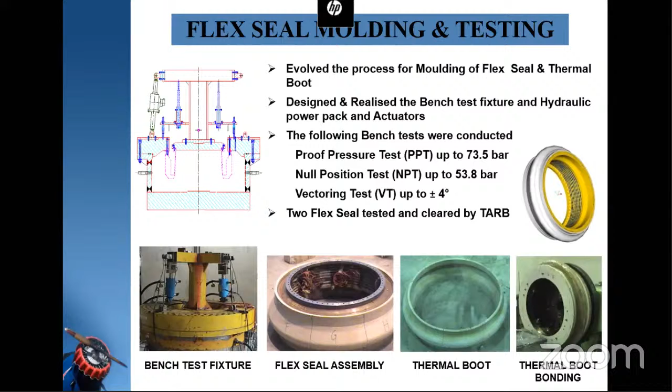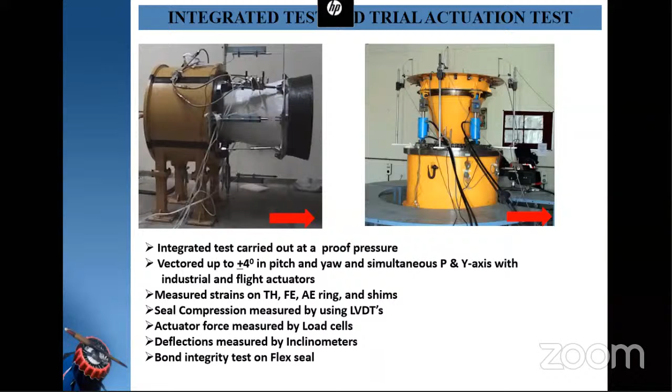During this test, we are measuring a lot of strains on different members called throat housing, forend and aftend ring. Then seal compression also we are measuring by using LVDTs. The actuator force is measured by using load cells. The deflections are measured by using inclinometers. Then bond integrity test also carried out after the integrated test.

So there is another important element in the missile system called composite rocket motor casing, which is done by filament winding technique as explained in the previous slides. Here we can see this is the composite rocket motor casing, which houses around 10 tons of propellant, having a 2 meter diameter and around 3 meter in length.

One such similar case, having 4 meter length and 1 meter diameter, is done for structural test applications. We have developed this technology for different missile applications. So different types of composite rocket motor casings are made, from 500 mm diameter, 3 meter length to around 2.4 meter diameter, 10 meter length casings, which can carry around 50 ton propellants, are also realized with this same technology.

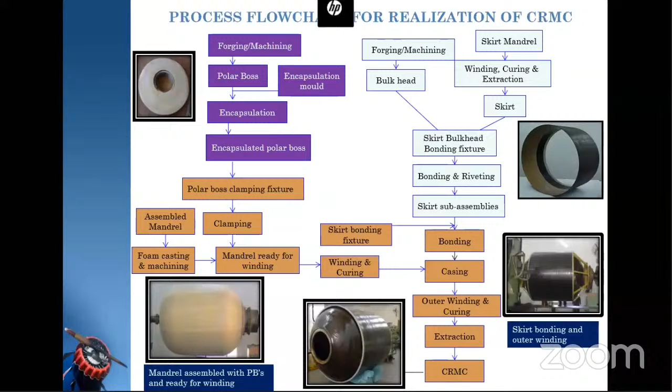So here is the flow chart which is meant for realization of the composite rocket motor casings. Here we can see the mandrel is made by using foam and central shaft. Then using the filament winding technique, the composite casing is made, and subsequently the skirts are bonded in order to make the complete casing.

So these are the complete rocket motor stage we call it. This has a propellant inside and igniter at the one side and the nozzle at the other end. So here, composite is used extensively in order to gain the weight advantage and to get more thrust for the given propellant.

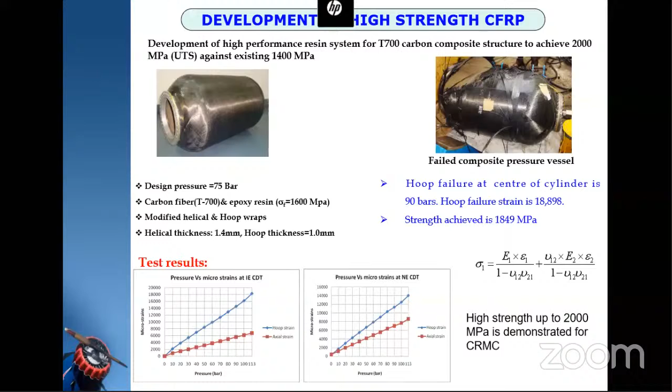So this is the pressure vessel made for realization of CRMC. Before realization of CRMC, we completely characterize the materials which we are using by doing a subscale motor. We have done all the characterization.

Then these composite rocket motor casings will withstand very high temperature environments because of its velocity and accelerations. So this outer surface has to be protected with external thermal protection system, which is made by silicone resin, in order to protect the surface of the composite from the hyperthermal environments.

So this is another variety of composite canister technology we have made. You can see the length of the composite is around 8 meter length, single shell wound in a single setup. These are meant for storing the missile system and launching the missile system. This technology is also established on our side.

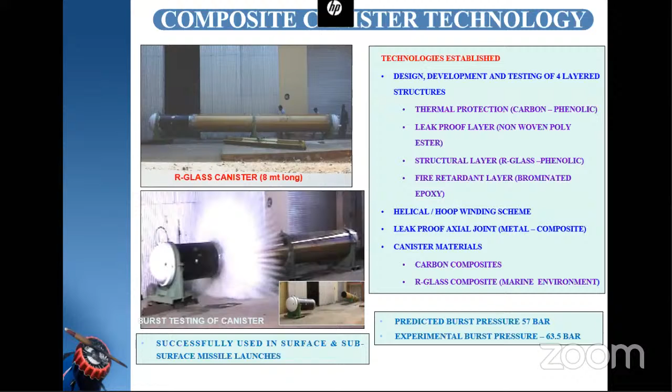This is one of the tests where we have done the burst test in order to find out the design capabilities of the canister. So these are the other important components called radomes, which are meant for giving electromagnetic transparency.

There is an antenna inside this radome, which allows electromagnetic waves to pass through this material and absorb in order to find out the enemy location. These techniques are used. These are the inevitable materials for aircrafts for getting the desired functionality of electromagnetic transparency.

So we have developed varieties of radomes with varieties of materials like Kevlar, low-loss polyester, glass, polyetherimide, D-glass, cyanate ester, E-glass phenolic, like different composites are made. So this is, as I already explained, the stiffened shell which is made of different hoop and longitudinal layers.

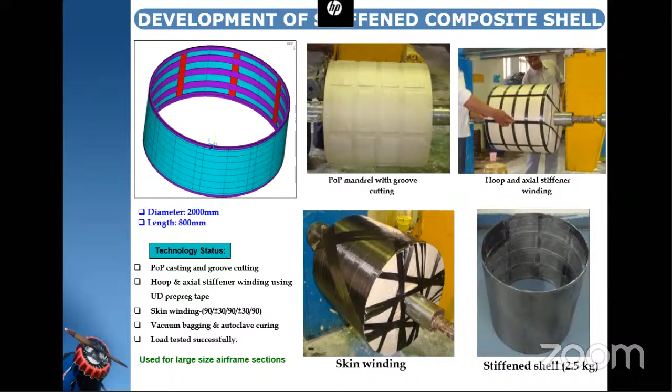Thank you, madam. Hello? Hello, sir, I'm there. Madam, my lecture is over, madam. Okay, thank you very much, sir. Thank you, madam, it's been a really long time. So any questions from the participants, please? Questions from the participants are welcome.

Dr. Seshaya is saying it's an excellent presentation. We welcome the questions, you can type in the chat window or you can unmute yourself.